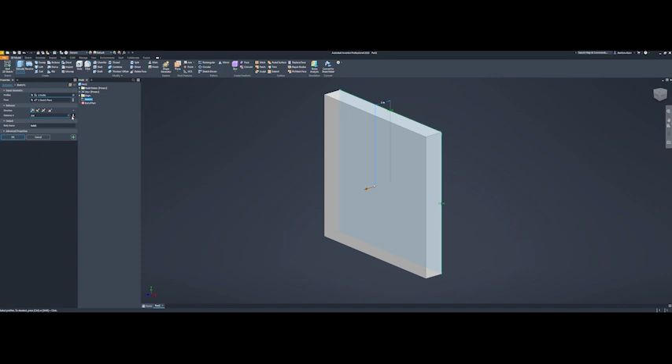And then for the distance, I can either do to next, or I can select the surface to go to, or I can type in a dimension. So I'm going to type in a dimension, do 8 to make a cube. So now that I have a cube, what happens when you want to make additional sketches? So you can start a new sketch just like you have before, but instead of seeing the 3 planes, they don't show up by default. You can still access them in the origin folder, and they are right here.

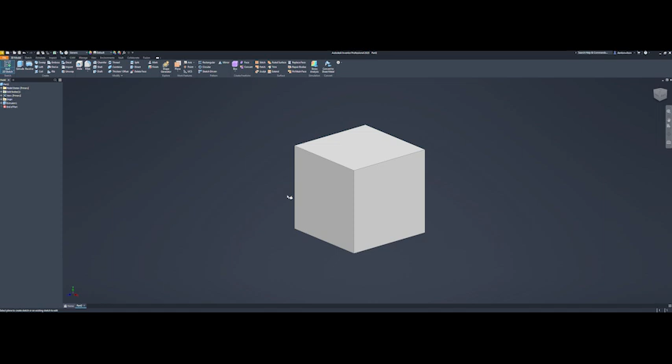Or you can actually put a sketch on a face of the part that you've already created. So I'm just going to do it on this face that's highlighted, click it, and now I'm creating a sketch on that face. So here I'm going to create another square. Let's say 4 by 4. Now I want this to be in the center, so I can either create a line in both directions that's a construction line and use a symmetric mate, or I can just dimension it. Since this is the easy part and I already know what it should be, I'm going to just dimension it.

And then as you may notice, now you can see these yellow lines. So these yellow lines are projected geometry. So when you click on them, they'll have a little symbol like this. What that means is it pulled the edge off of this cube that I had already done and created a line that was perfectly even with it on my sketch. Then I can use it as a reference. Obviously, you can't use an edge directly. It has to create a line first.

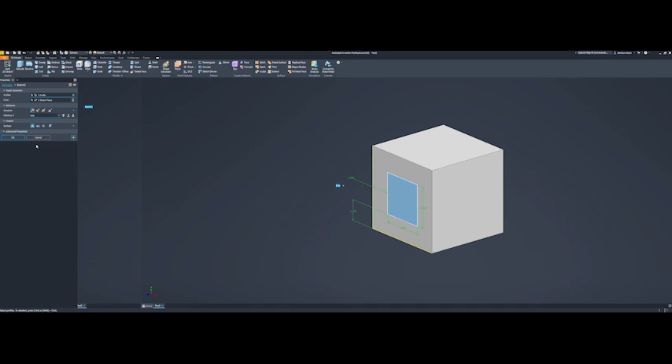So while they're on here, you can just ignore them and use them as a reference. So now I have my sketch fully constrained, as you can see because of the white. The yellow is fine. I'm going to finish. Now I'm going to do another extrude. So I'm going to click here. And again, I only have a single profile on the last sketch I did. So it's going to default and think that that's what I want to extrude.

So here we have a few more options than we did before. Right now we have the extrusion coming out just like we did before. But we're going to do something a little bit different. So all of these top four are the same thing. The difference is you also have this through all and this to next. So what we're going to do instead of an extrusion. So under this output, this boolean, the first one is join. So it creates another extrusion and then joins them together like they're one single part.

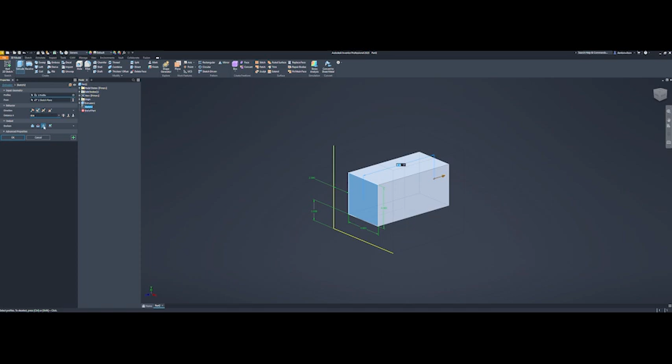The next is cut. And what that does, it will actually cut into the material, and you can change the depth, which we'll go back to in a sec. And then there's intersection, which basically, as it cuts through, looks at what things are overlapping, and will only keep what's overlapping. And then there's new solid. So new solid and join are very similar. The only difference is instead of actually creating it to where it's like one solid part, it'll create it to be like two pieces that are just touching each other. So we're going to go back to cut.

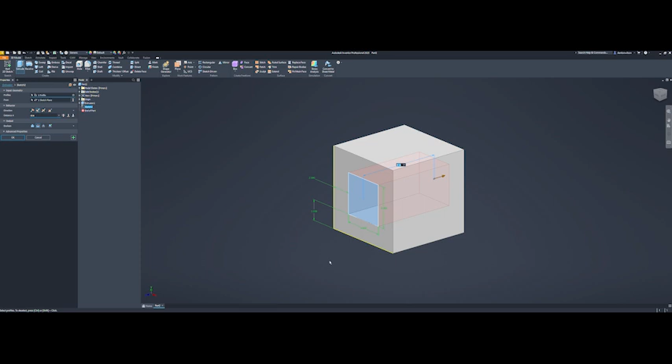And now, as we go into this, we can look at the cut itself. Like right now it's going through all because it is 8 inches. I could change that to say 4 inches. And now you can see that it only goes halfway. So that's how you can change the dimension. If you do this through all, it will go through the entire part. No matter how many sections of parts you have over here, it will continue to go through all of them.

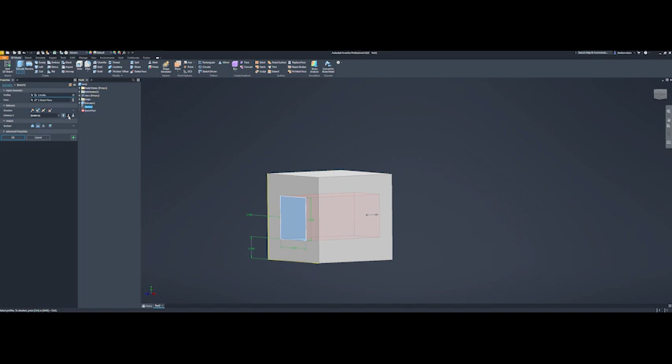You could do the to, and then there you would select a face. So now it would extrude up to here, and if you had something else over here, it would not continue on. We're just going to use the through all in this case to make a full hole in our cube. I click OK, and there is our part.